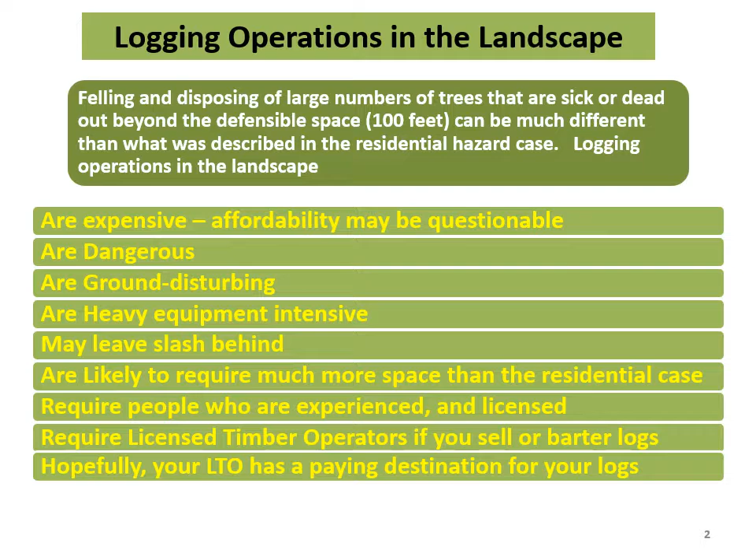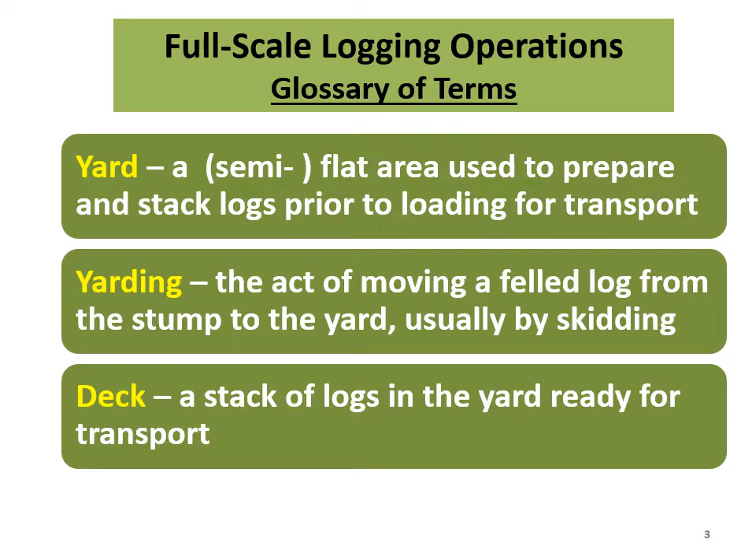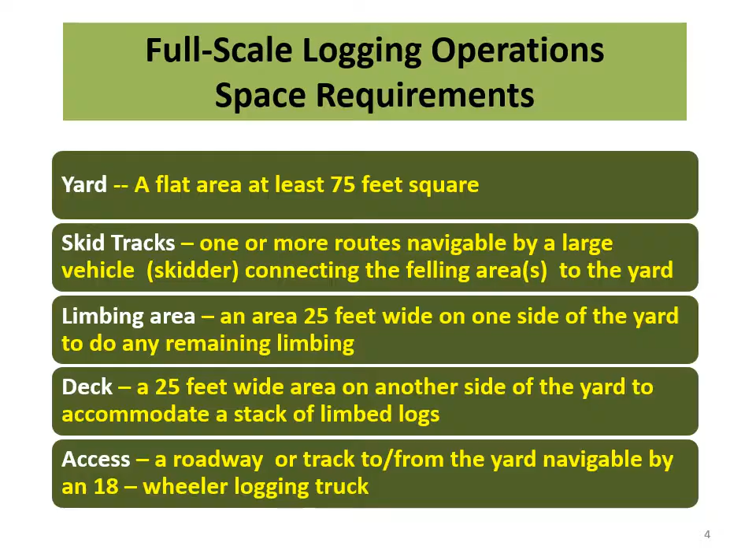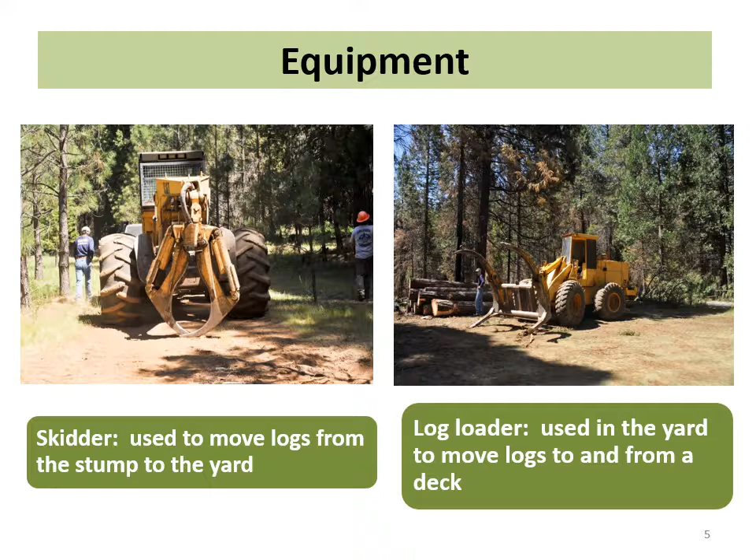A skidder, shown on the left, has rubber tires about 5 feet in diameter. The grapple on the back grabs the log at one end and drags it to the yard. The log is usually 38 feet long. A loader, shown on the right, has a much wider grapple. It grabs the center of the log and moves it from one place to another in the yard.

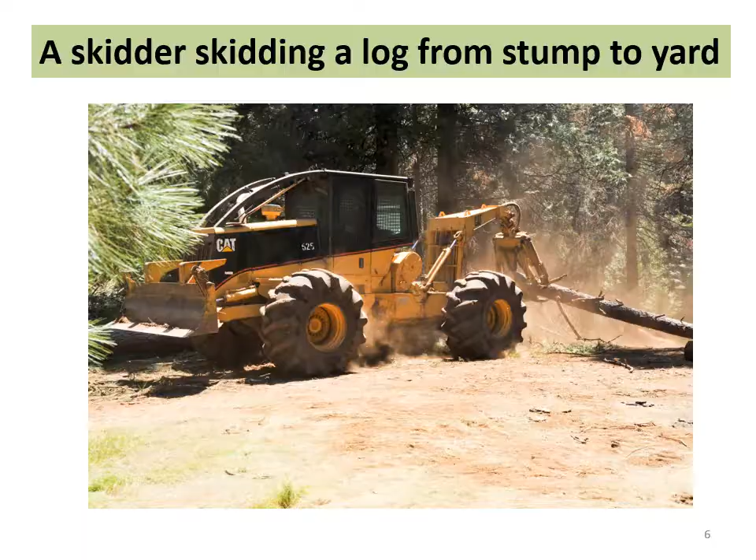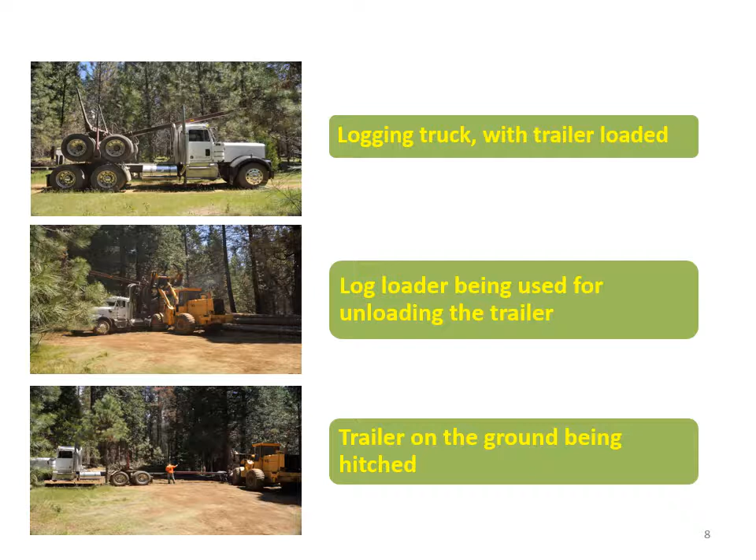Logging trucks have trailers in order to be able to haul 38-foot logs. When empty, the trailer rides in the bed of the truck. In order to be able to haul logs, the trailer must be unloaded from the truck and hitched up to it. This can be accomplished by the loader. In this image, the loader is loading a single log onto the truck and trailer.

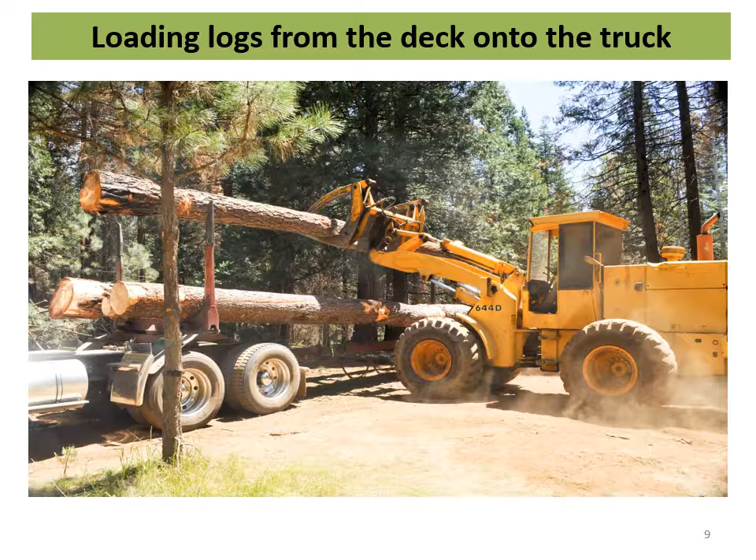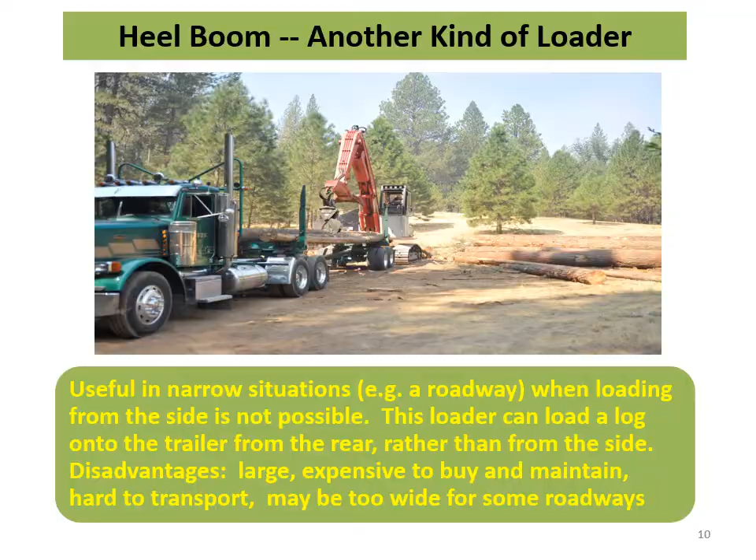If possible, be sure to interview more than one contractor. Discuss and agree on a project plan and secure a quote. Agree to and sign a memorandum of understanding. Assure that you have a public road encroachment permit if needed. If you are selling or bartering the logs, assure that the LTO has secured the proper exemption from CAL FIRE. Exemptions from CAL FIRE are documented and can be found using Google by searching on Board of Forestry timber harvest exemptions, followed by the year.

If you are selling or bartering the logs under ordinary circumstances, you will need a timber harvest plan. This is dictated by legislation known as the Forest Practices Act. Trees killed by beetles can be exempted from this requirement. The current exemptions are 1038C and 1038D and must be obtained from the landowner's licensed timber operator or registered professional forester. Please note that exemptions do change from time to time. Consult the CAL FIRE Board of Forestry website for an up-to-date list.